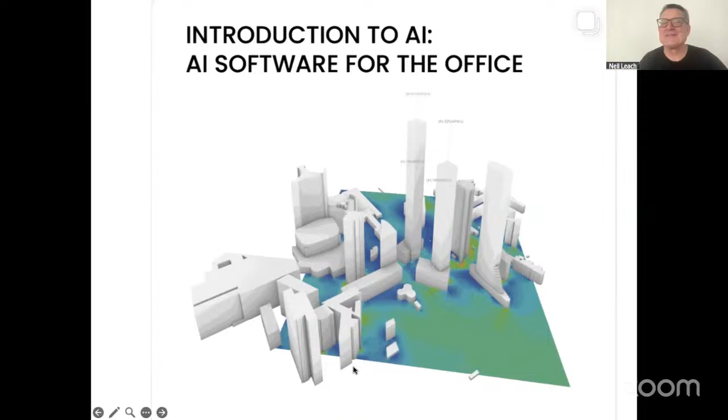So, Oana, it's great to have you here. Welcome. Thank you. It's great to be here. Over to you. Let me just unshare my screen. There we go. Okay. Fantastic. I will share my screen, and in the meantime, I might do a very short introduction as well. Give me a second. I will share the whole screen so we don't have interruptions. Sorry.

Indeed, my name is Oana Taut. I am one of the co-founders of Infrared City, and in Infrared City, I'm responsible for the product, for leading the product in the direction that will manage to fulfill most of your needs, the audience. So this is why interaction with you and having your questions and the ability to learn from what our users need is very important to us and to me in particular.

A little bit of introduction, as I have never been on Digital Futures before. I am an architect originally from Romania. I have experience as an architect in a very traditional way, working on the very large and the very small scale of buildings. And I've noticed a few common trends of frustrations and difficulties that we have in organizing ourselves and delivering projects in a way that allows us to achieve the full intentions of the project, but also, and these were actually the ones that were more impactful to me,

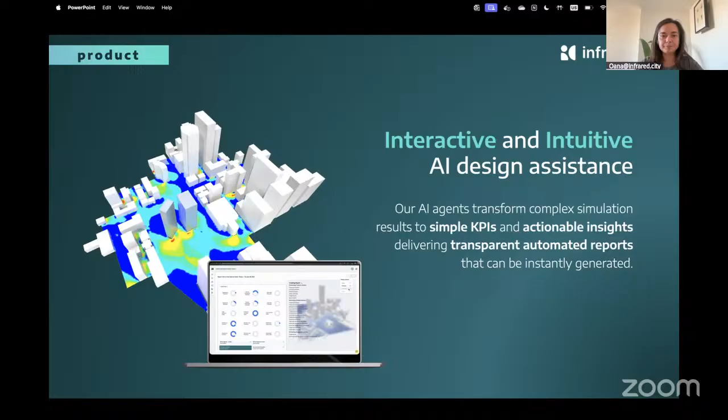So with this, I will go to the website to show you how you can sign up for an account, and also to take you through a quick live demo. So pressing the login, register, or try now button on our webpage will take you to a login page where you can very easily get a trial account. We have 14-day trials available today, and once you do, you will be sent to our web app page that will feature this demo project on your account.

I will take you through the demo project in a minute. For the moment, I would like to create a new project. And here you can search for any location in the world, and you can also make any necessary changes. I have mapped one of the locations where we could work in here.

So you can set up a project by simply putting in a location. Then if you need to make any adjustment to this, you can adjust the location, and as you will see, the geometry of the project will be automatically loaded and created on the project. You will get a view of the analyses that are available.

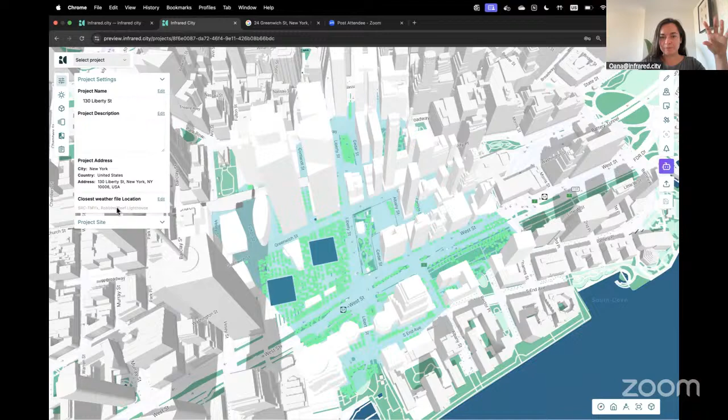So while the project is being set up, a few connections are happening. You get the three-dimensional model of the city, as well as we match the closest weather files. So the closest typical meteorological year. This is a file that essentially describes the weather conditions over a year in a location. If you're working on a more specific use case, you have the ability to upload your own weather file.

So we could be talking, for example, of a predictive weather, where you want to simulate for the year 2050, for example. You have the ability to upload your own file here, and you will find some description of the project location, the site information, and on the right hand side, you have a number of important utility features.

You can have full understandable visualizations of the climate on the climate dashboard. So this is reading the typical meteorological year file that it has extracted, or that the user has uploaded, and you are able to see the graphs regarding the solar paths, the values of radiation, sky coverage in relation to radiation, as well as temperature, humidity metrics, comfort metrics, and of course wind metrics.

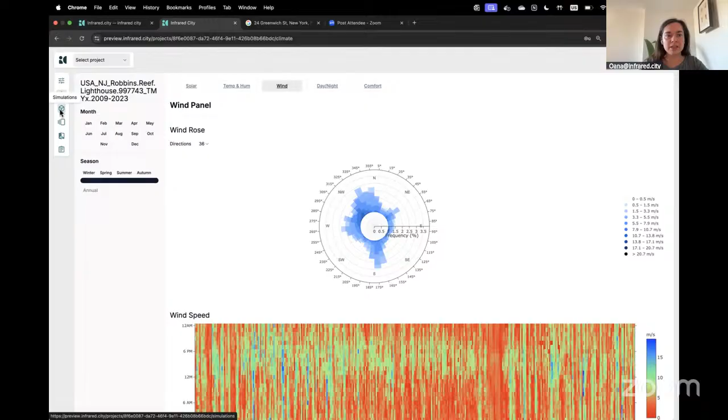And then the main feature of our application is this simulation workflow, which allows you to very simply add any of the existing simulations with minimal parameters that are necessary. So in this case, you can test wind speed for any given direction as well as any input speed. We can add this simulation, and you can add as many simulations as you want here, up to a number of 30 or so. So you are not limited to run simulations one by one. The ideal way would be to create a simulation scenario that you can then continue to use throughout your iteration.

You can also understand pedestrian wind comfort. So this is essentially connected to the typical meteorological year, gathering data about the wind distribution, both in terms of directions and in terms of speeds. And then it's enabling you to understand how a full year or a particular season would look in terms of comfort based on different comfort criteria that are standard, and you can understand more about how they are formed. So we can see, for example, winter comfort in New York City in the early morning hours when people are commuting to work.

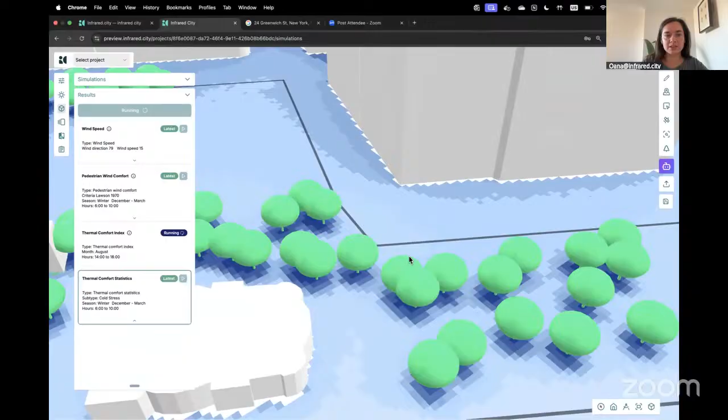Another important thing to say is the fact that the thermal comfort simulations will take into account the trees that are available on the site, and this is actually causing a bit of an extra time on this thermal comfort index simulation.

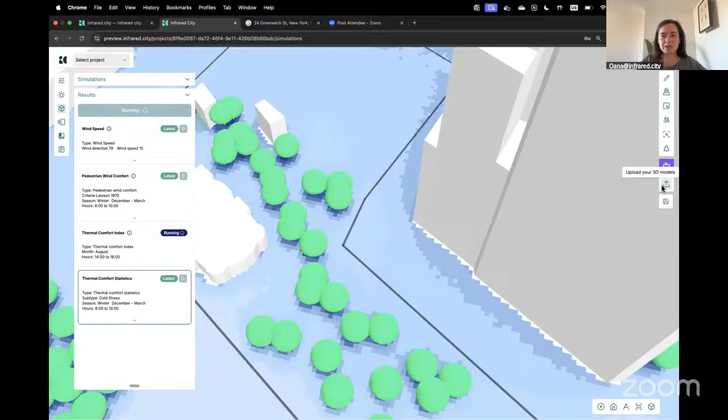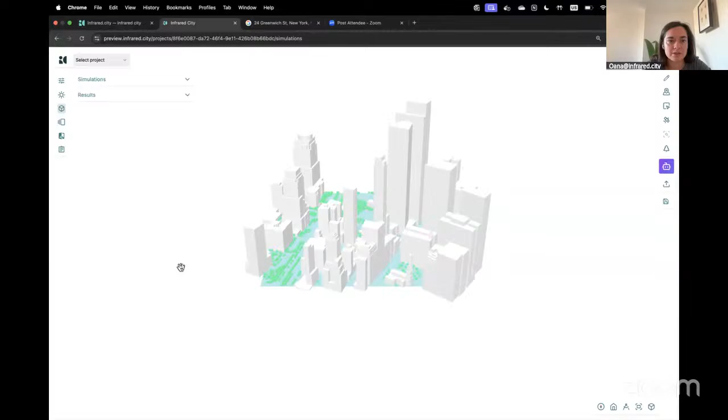So in the meantime, we can talk about the other options that you have. And on the right side, you have options for editing the existing contexts or the existing buildings. So in this case, we may want to delete this building. I will just refresh the simulation, as sometimes this can happen. So once we go to the results, the results have actually computed.

So you have the ability now to edit some of these buildings. So for example, we can remove one of these buildings over here and add a new building model. So I will look at this to show you all of the options. So you have the option to place the position of the new model on the site. And what you will see is that this model has been saved with the flipped axis, but you have the ability to rotate the object's axis, which will position it correctly.

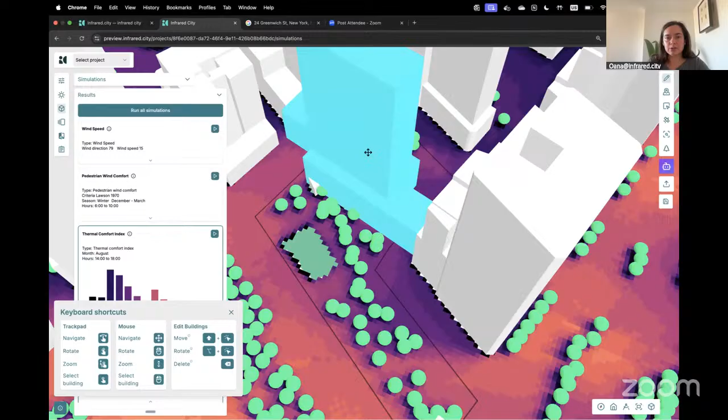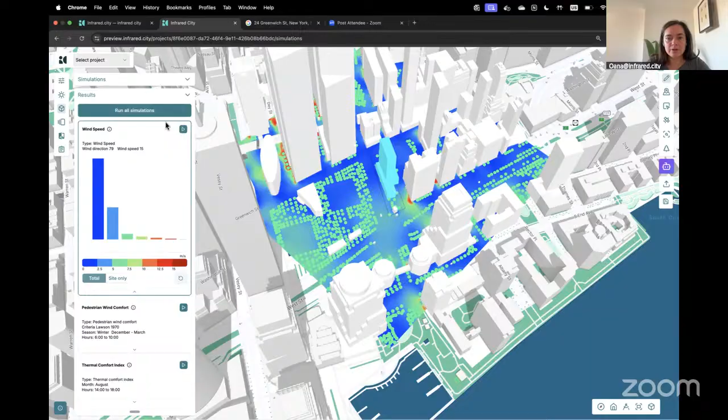So then we accept, and then using the other controls, the normal edit controls, you will have the ability to position the object on the site according to your needs. I will now run again only the wind speed simulation, just for the interest of time, but you can now run all of the simulations again and see how the results have changed between one and another. So now you can see that this simulation has been adapted, and the new building is showing in the simulation results.

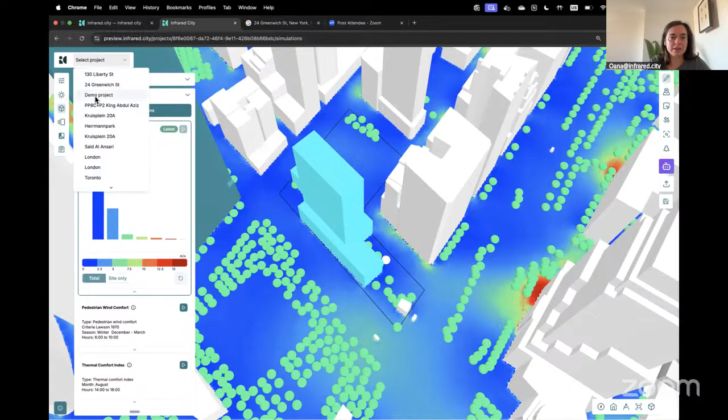Now, the question comes how you can actually understand the impact that you're having throughout the different iterations. And for this, I will go to the demo project, one of the other projects that have a number of different iterations run. And I will start by removing some of this vegetation here, just to make enough space for a building model. So then we can add a new building. I have another one here. I think this should be fine. Yeah, this should be fine. And hope it will fit.

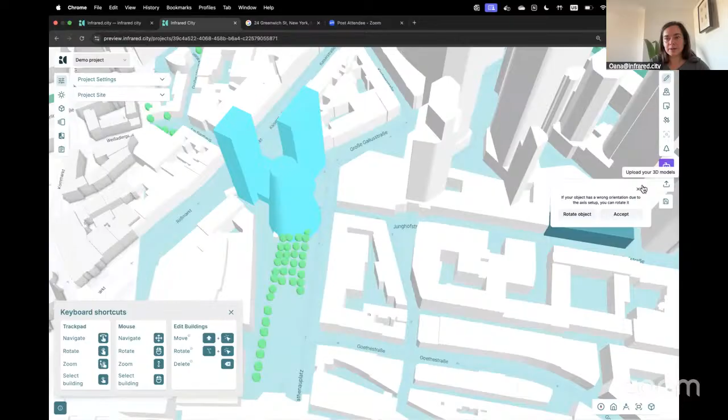Okay. This is actually quite a big model, but we can position it here to see how it would change the KPIs. And once you do this, you can run the simulations again. Again, here we have a number of simulations. You can run all of the simulations again and use the save snapshot component. I will, in this case, again, in the interest of time, run only one simulation to see how the model adapts the wind patterns.

And in order to save the design option or the snapshot, you would need to run all of the simulations. So this will force running all the available simulations. However, we already have saved a number of design options here. Once a design option is saved, these key performance indicators are automatically computed for each of the simulations that were run, allowing you to essentially rank all the different design options according to parameters that are most important to you.

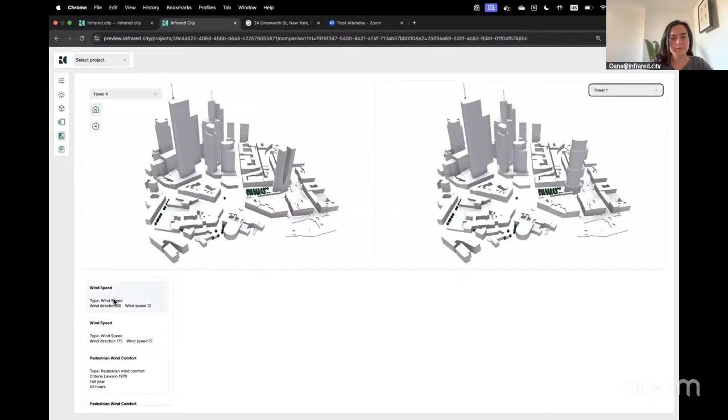So, for example, we want to ensure that we have the highest amount of ventilated area. So we will select the option from here that achieves the highest number, and we will see that this is option 4, that is a tower. So this allows us to go into a comparison mode where you can see the selected option as well as another tower option, and understand how the results are different from each other.

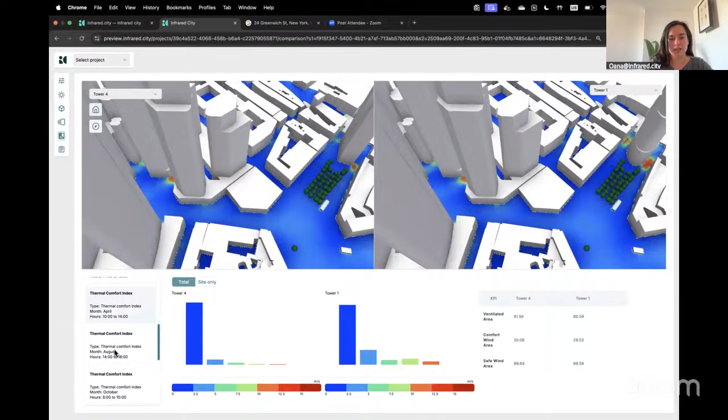So this is saving the simulations that were already run. It's not rerunning the simulations. And you can see how the two designs perform compared to each other. So we can check the shading or understand the reality of the situation on the site versus on the total area, as well as evaluate a range of temperatures that are available on the site.

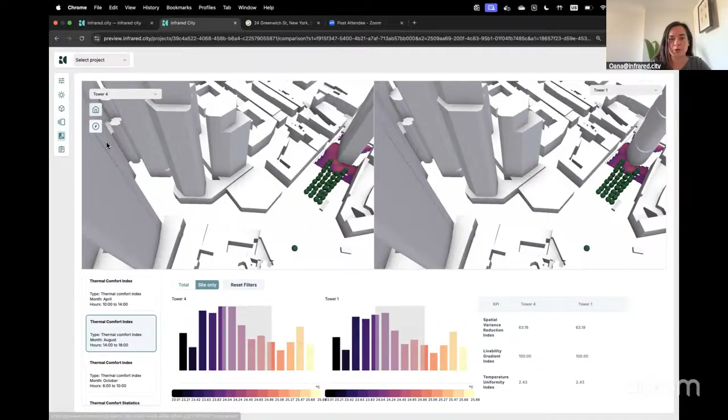Now, with all of the information, you also have access to a reports generation mode where you can set up a new report very easily by selecting one of the scenarios to be the main scenario, as well as all the different design options that you want to show, and you can generate a full report.

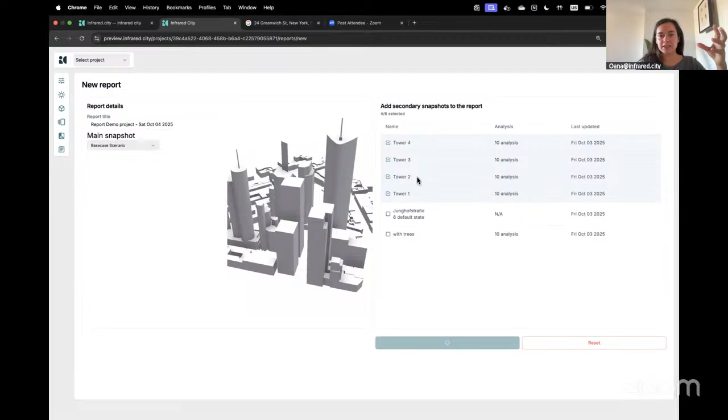This will take a few minutes because it's actually gathering all of the information from the project, as well as sending it to a number of AI agents with expertise or trained with knowledge on environmental and climate policy, as well as scientific papers and so on. And it's generating insights on your design.

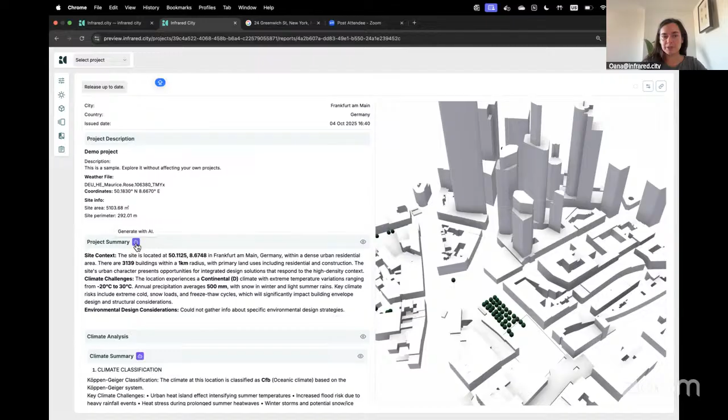Furthermore, this report is presented in this split view with half of the screen available for an interactive display where you can actually see the design and the simulations in full 3D mode. As a user, you have the ability to edit any of these gray fields, as well as run, edit, and rerun all of the AI summaries. So where you see this button, this will be generated with AI.

You can see that it's not only understanding information about the location, but actually looking at the number of buildings on the site that are visible, and giving you the information about this, as well as some minimal information about the weather, about the climate. You can have a lot more information there, where you can also show all the climate graphs. So all of this information can then be available for you to share with your client, with your other team members who don't have access to Infrared City, or with anyone you wish, really.

One more thing to say is that the AI responses can be edited. So if you wish to check the results and make adjustments, you can do so. If you want to generate again, you can always click the generate button again. But the most important aspect of this report is that it captures all of the design options that you selected with all of the simulation results.

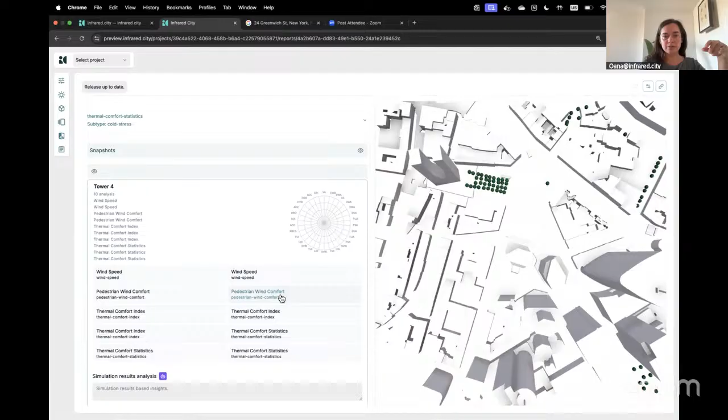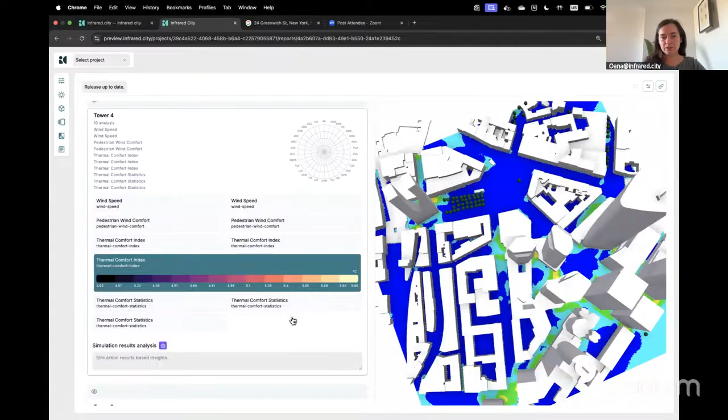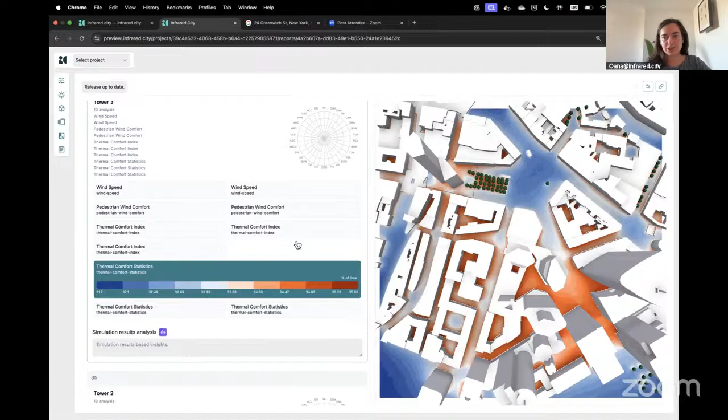So we can see, for example, the pedestrian wind comfort and the impact of this tower on the pedestrian wind comfort, or the impact on the different thermal comfort simulations that you have run. You can also check the other simulations, and for all of them you can generate with AI an interpretation of both the design and the results. This will take us some time, but I can start the generation. You will see that it cycles through all the information, and it will then be able to add a summary to this report.

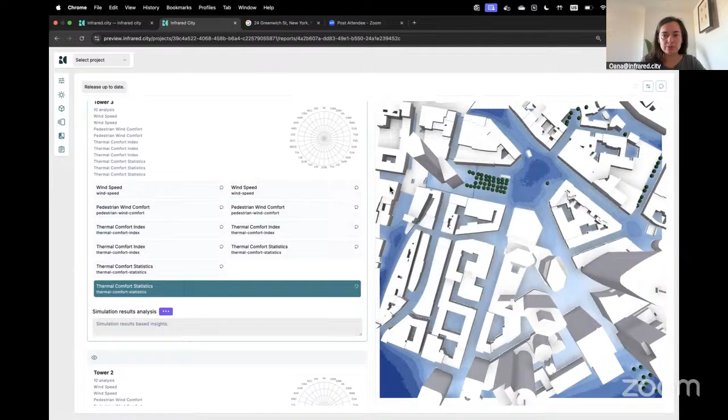And in the meantime, while this generates, I want to also take you through to our connector. I will not present everything, but we do have a Grasshopper connector that will enable you to do some very interesting workflows. On one hand, it enables you to design in real time and get the simulations automatically. But even further than that, it allows you to get the simulation results in raw format, so to get the raw data directly in your Grasshopper definition, so that you can do any further work on it. I will again from here load the latest project that we worked on.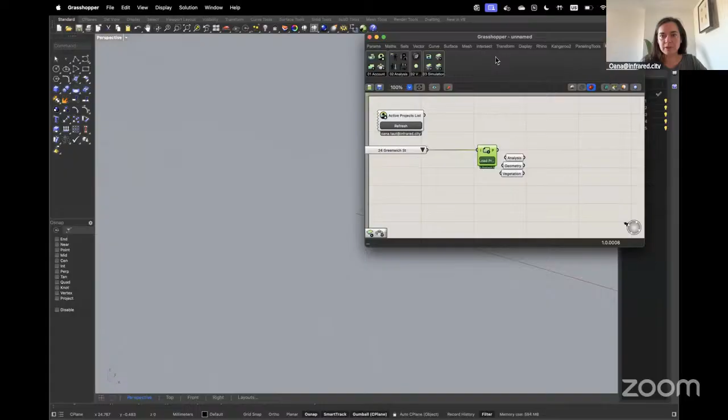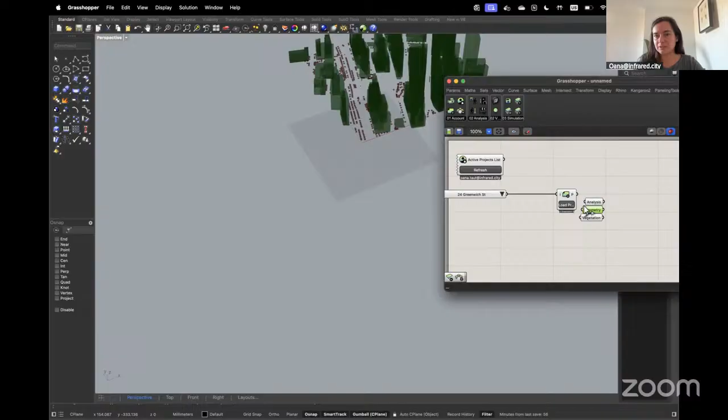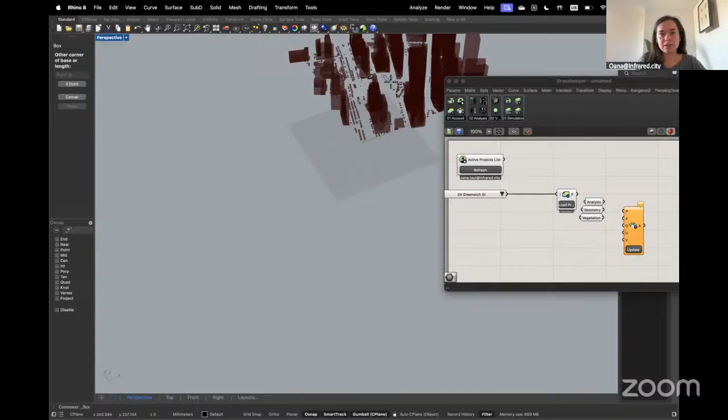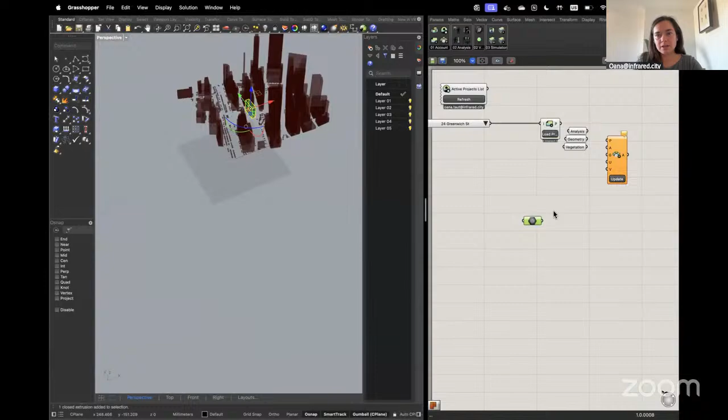And you will see that you get immediately all the context information on your Grasshopper definition. You can keep it, delete it, bake it, and make modifications. You also get the vegetation separately and the analysis configuration, which allows you to then update the project in any way that you need. So I can potentially just add another building in here, merge it to the existing buildings that I have, and send it to the project, which will enable us to see the project updated on the website.

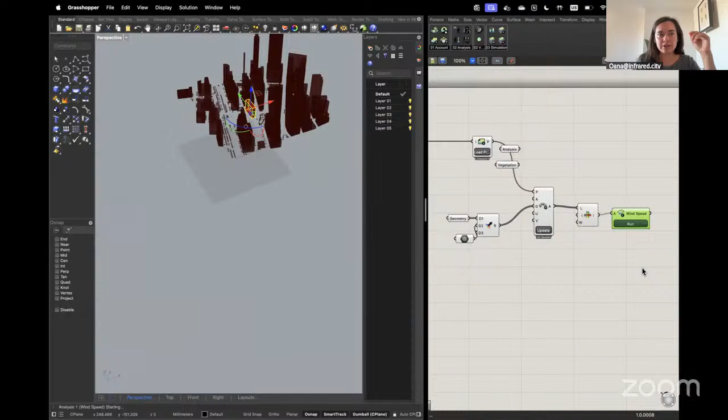I will load it in a few minutes, but I also want to show you how you can actually run an analysis by going to the simulation mode. You can select from here. We'll select only the wind speed analysis to make it faster to run. However, you can run all the analyses at the same time. You can click run here and you will have a notification that the analysis is starting, and then that it's completed. You will be able to see the results using this component.

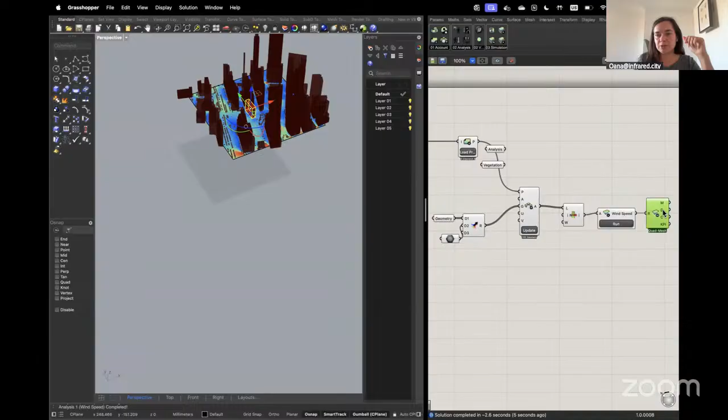And you have the mesh results, the data, as well as the KPIs available directly in Rhino in this case, and also in Revit, which is pending the launch. It's at the moment in restricted access.

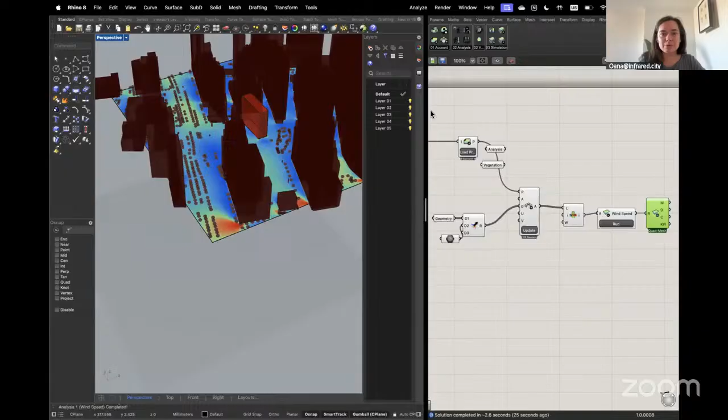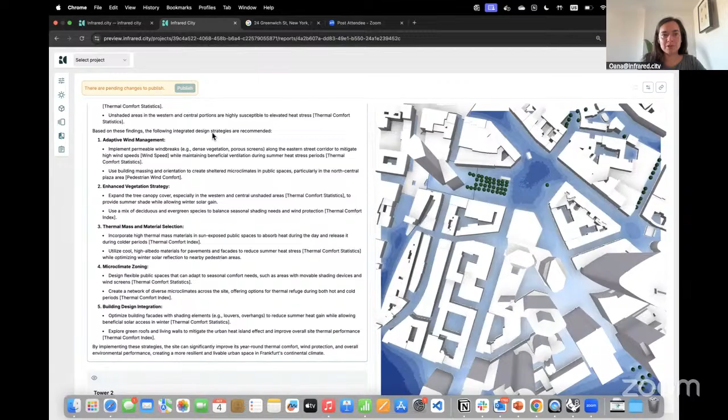So if we go now back to the report, on the other project we should already have the results of the AI interpretation of the simulation of the design solution, complete with a number of strategy recommendations, which can be very interesting to go through. And you have the ability to publish this report and share it online, or share it with specific members of the team. You can also download this report in markdown format, which enables you to have all of the screenshots from the projects, as well as the graphs and the text.

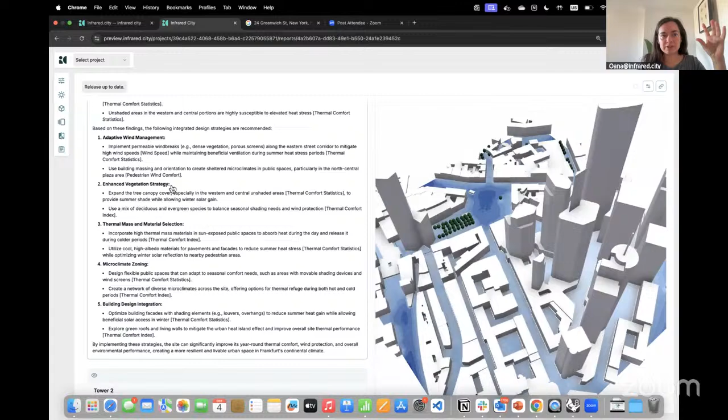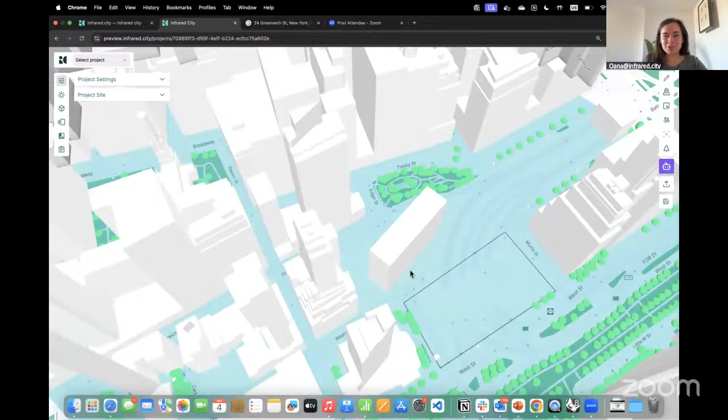And if we now go to the project that we just updated through Grasshopper, you should see that this is available here. I think this would be it. There we go. So you can see that the very badly added cube or box is now here, as well as the simulation that has already been run in Grasshopper is accessible through here.

And this is essentially what Infrared City platform is today. It is a platform for your agile design, for your agile sustainable design, particularly for block level, so new buildings and master plans at the earliest stages of design. We are expanding this solution, and you will see some very interesting updates in the coming months. But I will leave this for another day.

Thank you. Mulțumesc. Thank you.

We've got a few questions coming in, and I just want to make an initial comment, and that is that I think what you're doing with these, I see them as surrogate models, is that you are really speeding up the design process. This is not an accurate model, but it's enough to give you a sense of where you can go. And actually, from the recent second edition of my book, the yellow one, I had three offices that I looked at: Foster and Partners, Zaha Hadid Architects, and Coop Himmelb(l)au, and Foster and Partners took a very different view.

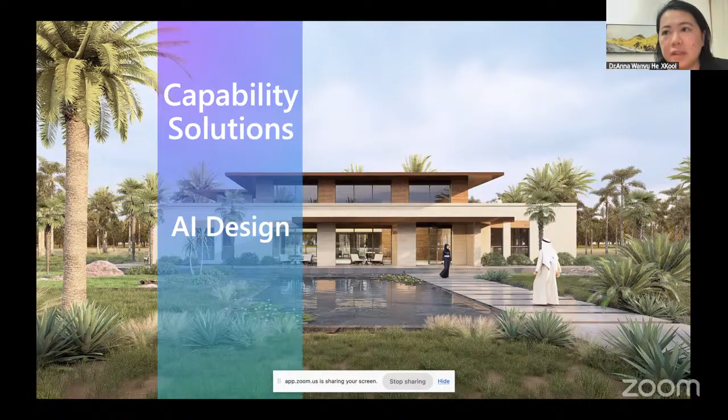So first of all, I will show what we are setting up today so that the AI agent can help us. First of all is the AI design part, which is covering the master planning, building design, and interior. One thing is we started with the residential typologies, not everything. Residential typologies for us means the apartments, villas, hotels, dormitories, and so on. Those types are the most demanding in the market, and meanwhile, you have most of the data from those sectors.

So we started with those, and you may know that we started in 2016, with a large data set supported by our clients and our collaborators, and we trained our own models for the different sectors, which can cover right now the master plan, building, and interior design. In my last year's presentation, I went through those three and the way we work through the AI. But today I'm gonna show something different.

Sorry, let me share my screen. If I may, I'll just close the video. It's easier. Can you see my screen now? I think it should be all right.

So this is something new on our LookX AI. If you use LookX, you may know previously we were focused on image generation, like image to image, text to image, real time, drawing your things, or generating videos, and so on. But today we have newly launched this chat generation, meaning it's AI agent based. So you just talk to it, and it will give you the workflow, and you click each step to get your outputs.

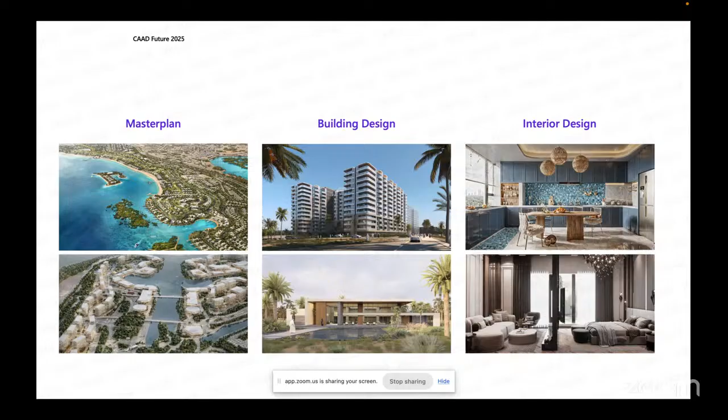Of course, big enterprises like Google or OpenAI are doing similar things, but we're confident in our own data sets, that we train better with our architecture, urban design, and interior design data sets and get much better quality. And beyond that, what we are setting up is this level of machine interpretable content. Images and videos are just one thing. The key is how we can go beyond.

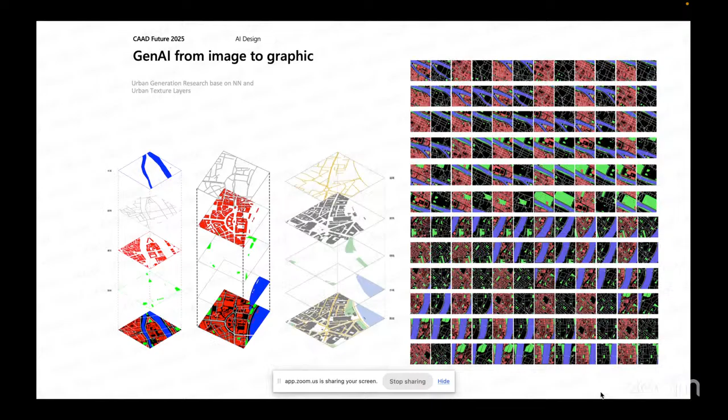So we started with image generation, of course, but meanwhile, at XKool, we started geometry and 3D model generation in the beginning. For instance, at the master plan scale, integrating with the urban context, we also tried to set up those envelopes with AI and generate abstract 3D models. Those abstract 3D models can be transformed into our format. That is something we did for the XKool Design Cloud, as you can see here.

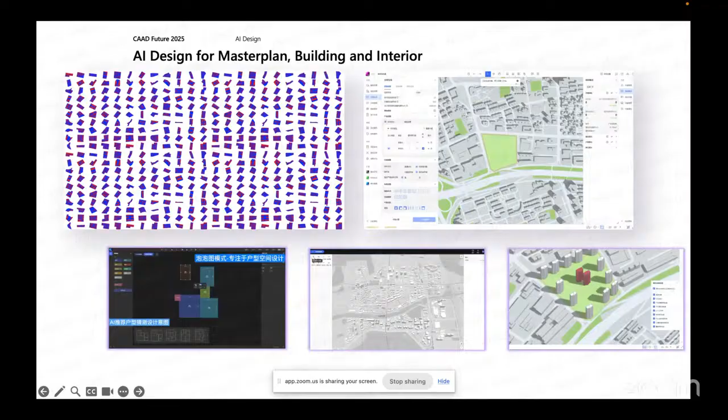You key in your information and we generate options for you, not just one, but thousands of options. All those are pre-trained on the relevant data sets to get the best option out of them. So this is the scale of the master plan, as well as the building itself. And now we are entering the interior, or more detailed, phases. I will walk through some of our working samples. Because of time constraints, I will jump a little bit quicker.

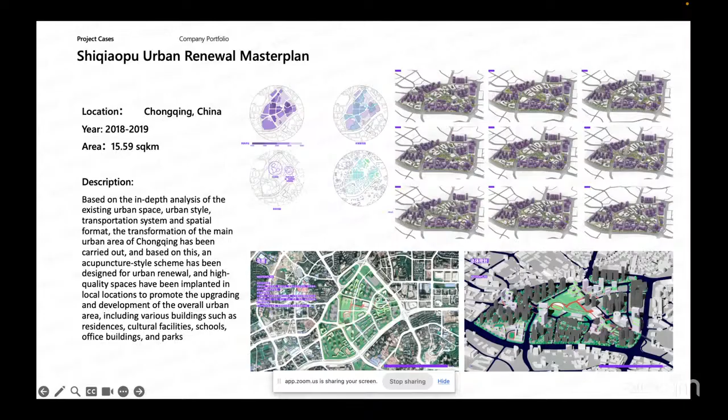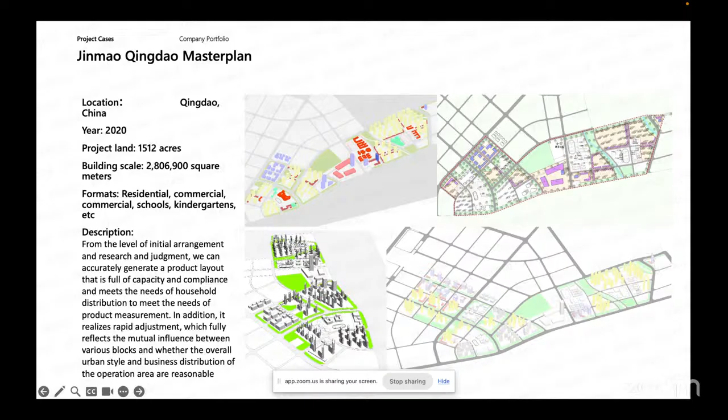So first of all, the generations we are using are combined with spatial models and then applied to different real cases. That helps us refine and fine-tune the model better and better. Those are all the projects from past years, and this is one of the projects we did quite a long time ago, before XKool was established. We used algorithms to generate the design and then do the simulations, improvement, and optimization. And you can see this is the design. Eventually, this is for a concept stage.

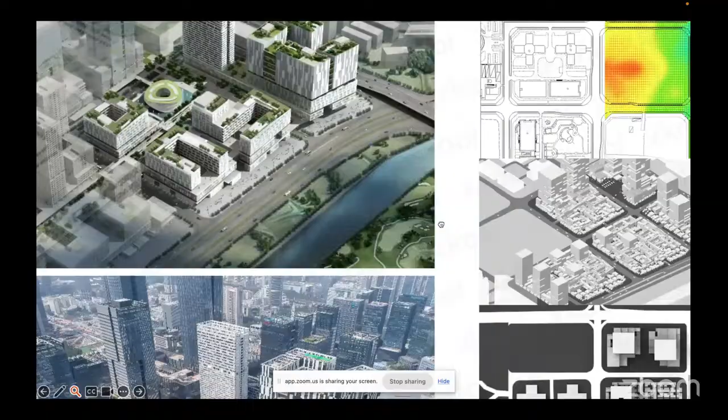The red ones mean the higher density area, and the blue ones are lower density area. And eventually we got this part of the work, which is phase 2, which is this one, and the entire thing is exactly like what has been predicted. See, there are the higher density ones, and we are doing this part, and it has been built exactly like the design. So this is how it looks today.

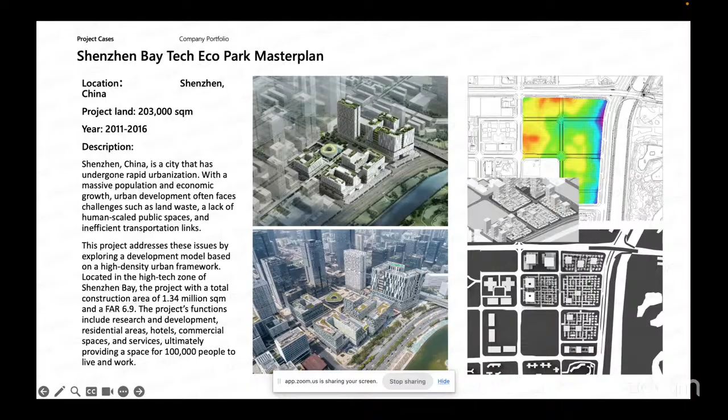So if you visit China, you can come here. This is in Shenzhen Bay Area. It's one of the high-tech parks, very famous, and next to most of the famous companies in China, like Tencent and so on. So we consider this one as one of the early examples that has been done by AI, or machine learning, let's say. It's not exactly the AI notion we're talking about today for large language models or those deep models. But this is how we started.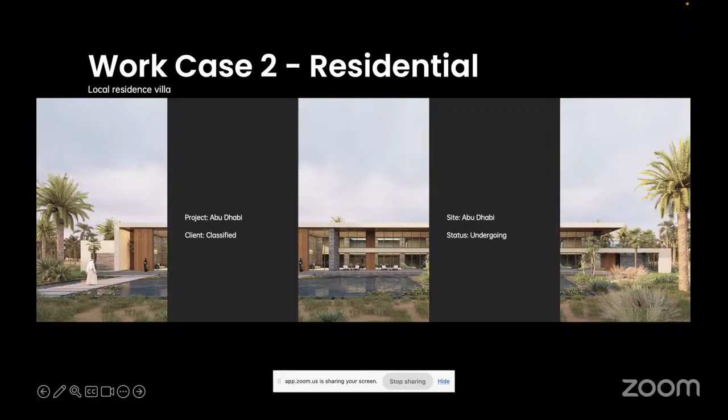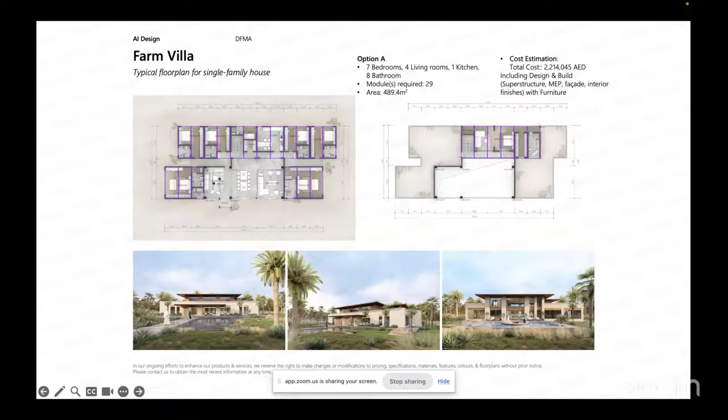And then we extended that kind of experience and our technologies into the residential typology. The previous one was a tech park, meaning mostly offices, some commercial, and some apartments. Then we focused on the apartments and the villas, these typologies. I will jump a bit fast. The key for this one is we're using a modular system to do it. If you check this one, you will see those are the modules that we are using to compose the design. And the modules we are talking about are the 3D volumetric modules.

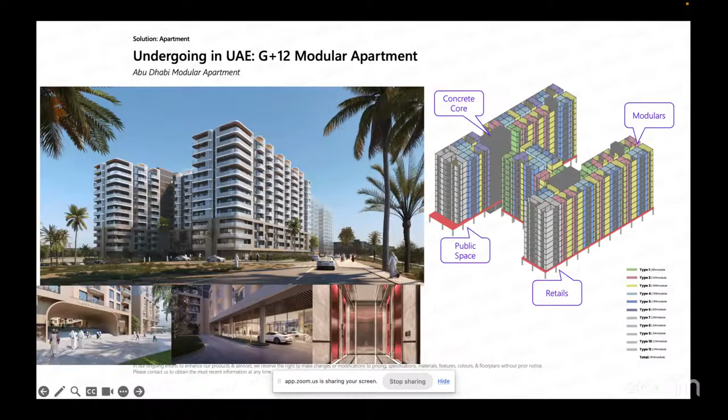This is one of our latest working samples that we did in Abu Dhabi with AI-generated options. And it's not just the 3D geometry, it includes the strategy of using the modular system and all the simulation for physical performance, as well as videos, images, and so on. And talking about modular, what we're talking about is this 3D volumetric. You can build 80-90% in a factory.

This is why we're using this approach, because in 2021 we were working on a very interesting project, which is a hotel built with a modular system, because we have been into this particular typology since 2019. Why is this? Because I believe AI needs to connect with manufacturing to support us from design to manufacturing with DFMA, design for manufacturing and assembly, for some of the typologies. So steel modular and concrete modular are the ones we are focused on for the residential typologies, going through the entire planning, design, manufacturing, and assembly.

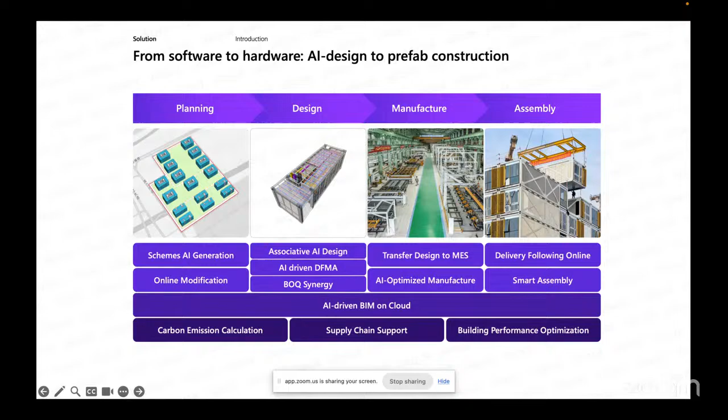We finally finished this hotel project in a very short time, 4 months. This is an incredible time compared to the conventional way. Time means efficiency. Efficiency here is not just for the design, but also for the procurement, the manufacturing, and the on-site assembly, meaning the construction part. So everything here you can see overlaps, and the key is our ABC model, with the components library supporting the entire thing to be compliant and to be really realized.

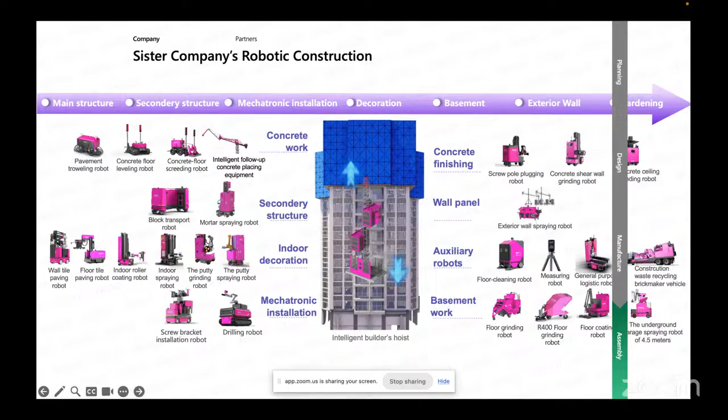And one more thing is that this format can also integrate with machines. As you may know, China invents a lot of construction machines, and this is one of our sister companies' work. They have more than 28 types of construction robots, and those robots can also use our ABC model, which is machine-interpretable content for the site. That can support us not just in the factory but also on site. And this is how we think the future is going to look.

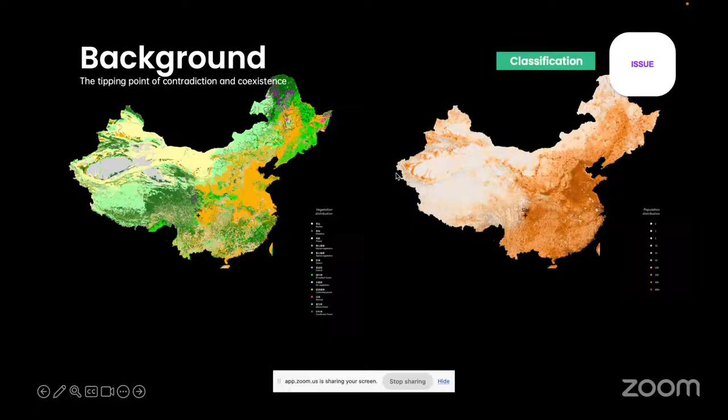And this is how AI can be used here, or play a role here: to balance standardization and customization, and then those works can go through to the site with, as mentioned, the robots and the construction team. So the final case is one of the museum projects that we are working on.

The background of this project is in the middle of China, in between the mountains and the basin location, and in this kind of location, we can see the different landscape, the topographies and the urban tissues.

And with all those solutions, sorry. Sorry. Wait a second.

And with all those solutions, an issue to be found is that in this particular site, we need to protect the biological habitat, and also make it more user friendly for human habitation. So the position for us is to integrate nature and human society. And in this way, our argument becomes very simple. It's a kind of integration with the mountain and the river on the site.

It is not a very dominant and strong configuration that cuts the mountain and river connections. So the building becomes quite secondary for the site. So this is the argument, and then how to realize this design concept. So the AI helps here to generate different options and meanwhile to simulate different options.

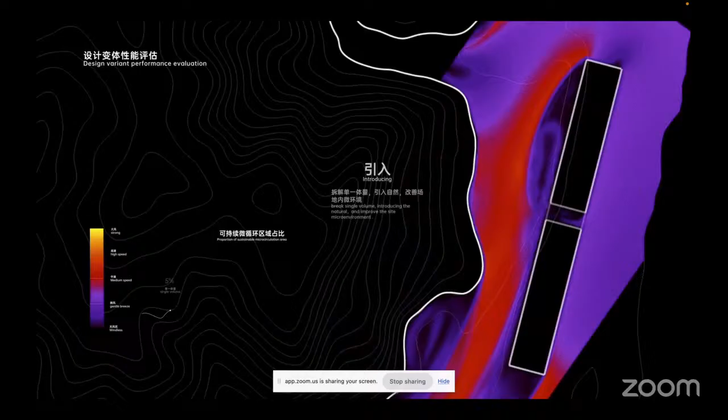And with all those simulations, we find out that these kinds of layouts can help us get a better environmental performance in terms of the microenvironment, the temperature, the ventilation, biological accessibility, and so on. So eventually, with multiple optimizations, we finalize the form and get this final result.

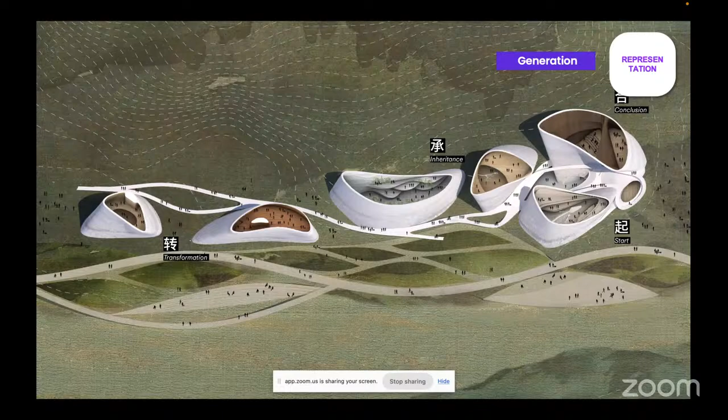It looks quite good in terms of its integration with the site and with the idea. And this is how it looks. Of course, there is some massing. You can see the massing there because we have a GFA, of course.

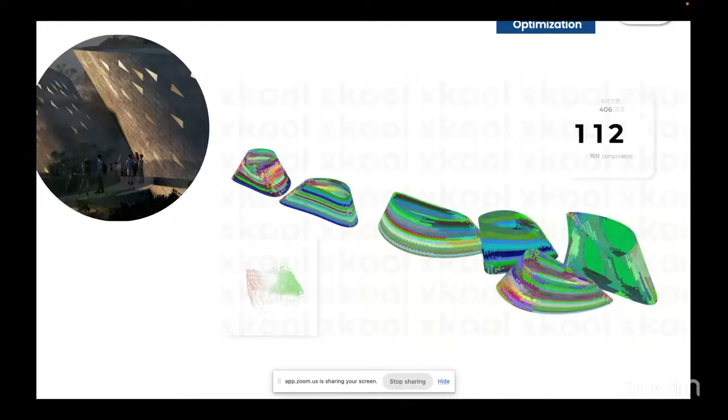But for the later stages, there's also something we used for optimization, which is to generate a new facade to replace what had more than 30,000 different triangular tiles, reducing it to 112 types. And this significantly drops the cost as well as the complexity of manufacturing and construction. And this is how it looks when done.

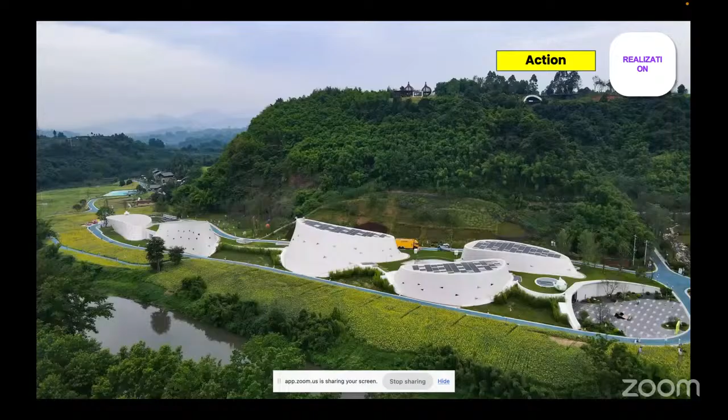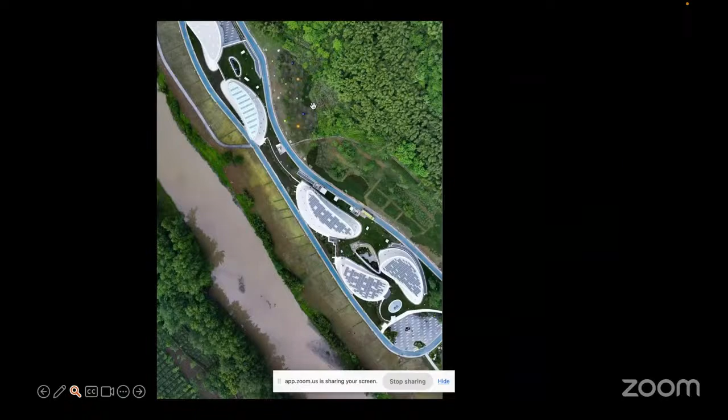It's quite gloomy in the Sichuan region. This is a real photo, by the way. So it has been changed a little bit, because you can see one of the pavilions has been cancelled because we wanted to reduce the size of it.

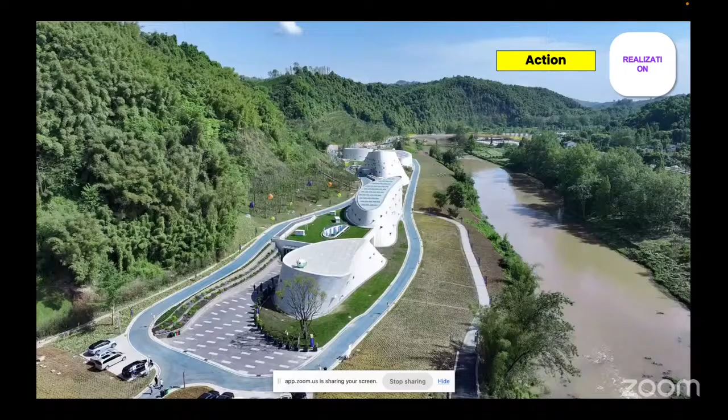And as a conclusion, I want to share with everyone that I do believe AI will take a lot of the manual works, but those are manual works. It cannot replace the thinking works. Even when you are working with AI today, for instance ChatGPT, you need to ask the question. And the question is the most important, not the answer by AI. So how we can formulate a really good question is the most important thing.

And I believe this is the key strength of a human being. Because as we can see in the workflow: find the issue, find our positioning, find our argument, and provide a solution. This is what humans are more good at. And from the solution to the scenario schemes, preparation, representation, or even realization, AI can help a lot.

So as a conclusion, today it looks like we as humans do more, but gradually AI will do more and more. However, we will become the new Homo. And just a quote from Charles Darwin: it is not the strongest of the species that survives, nor the most intelligent, but the one most responsive to change. Okay, thank you, Neil. That's it.